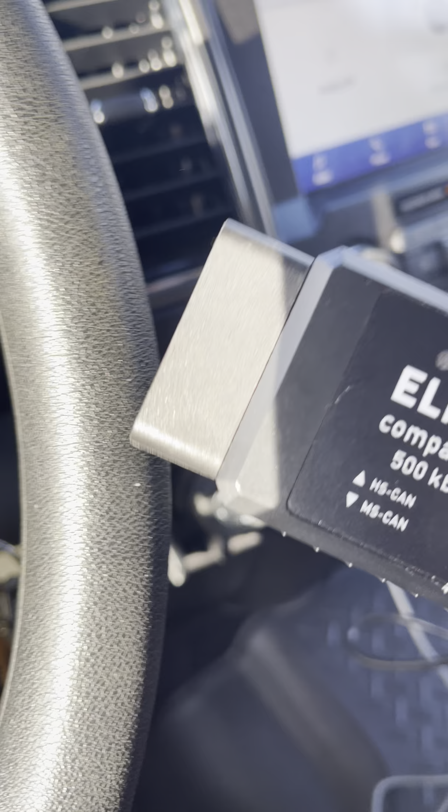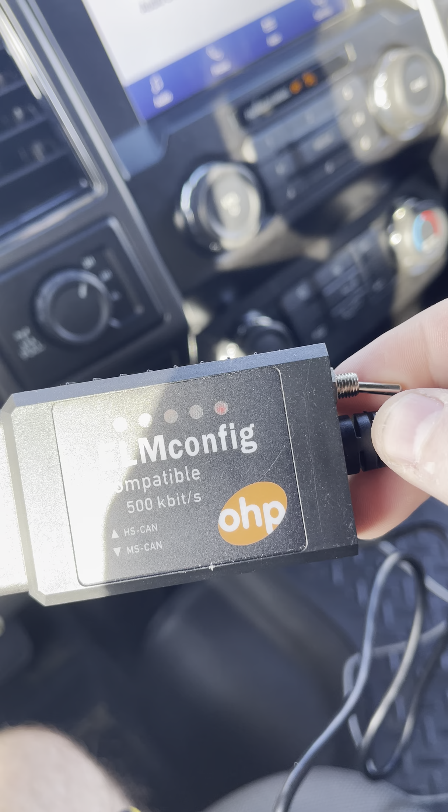So this is the connector I have. Some don't have the switch, some do. This one does, so as you use the program it'll kind of tell you what setting to have the switch in. To get started I'm just going to have it flipped. Actually, had it the right way, the HS CAN. I'll get this in the port down below, then we'll jump over to the computer.

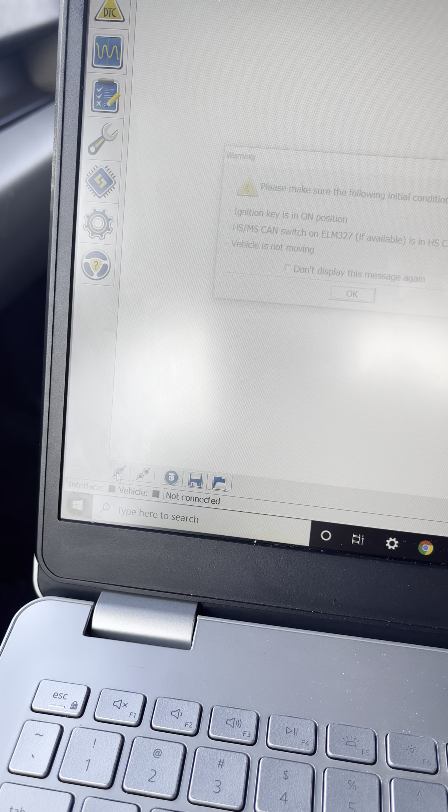With that connected, I'm going to go ahead and turn the ignition on the truck, which it is. When you open the program, you want to go to the top left icon that has the picture of a car with an information symbol. We're going to go down here to the bottom and select the button to connect. If you have that switch, the dialog says make sure the key is on, make sure your switch is switched over to HS CAN position, which it is, and we're not moving. So we're going to hit OK.

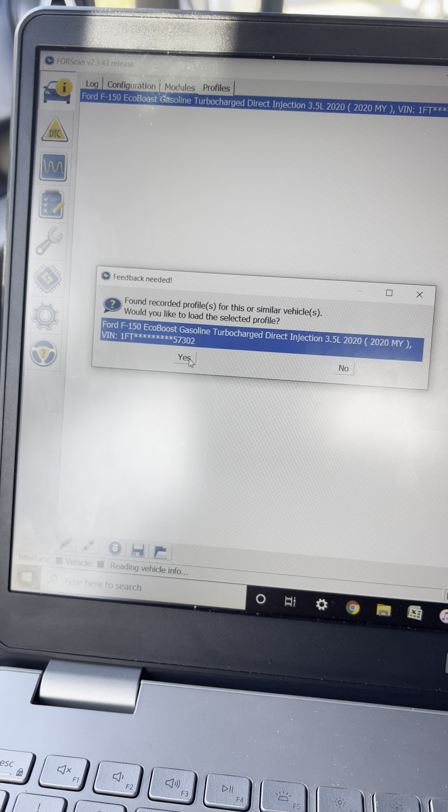And it's just asking to select a profile. I'm going to go ahead and hit yes, and it's going to start going through. Make sure everything's selected.

And now we wait. You can see on the bottom left it says reading vehicle info. This is my second time doing this; the first time actually took quite a bit of time. So this is kind of just going through the motions now, reading the computer, all the modules that are there. This could take a couple minutes here. While we're waiting for that to come up...

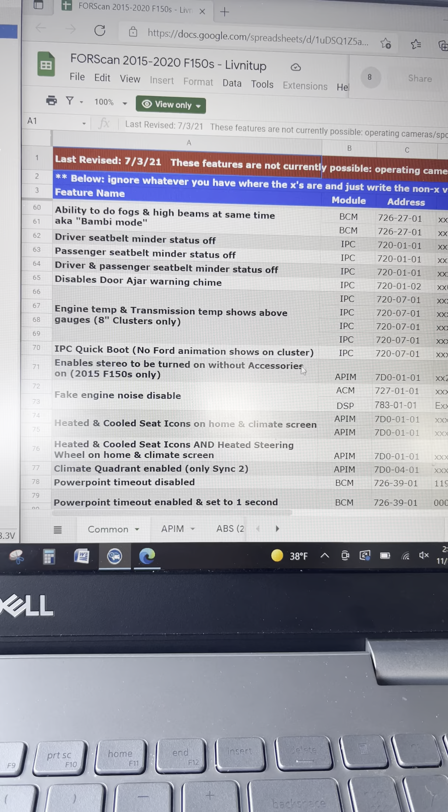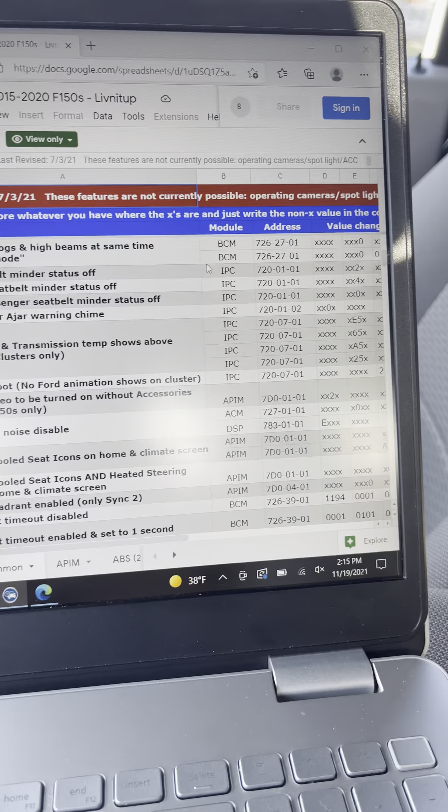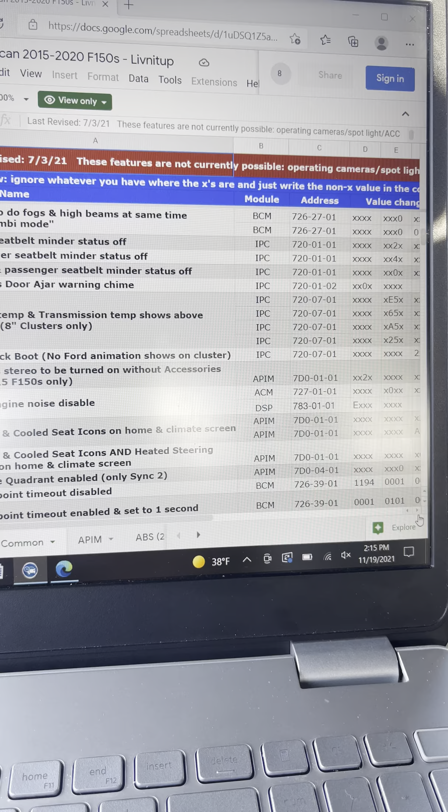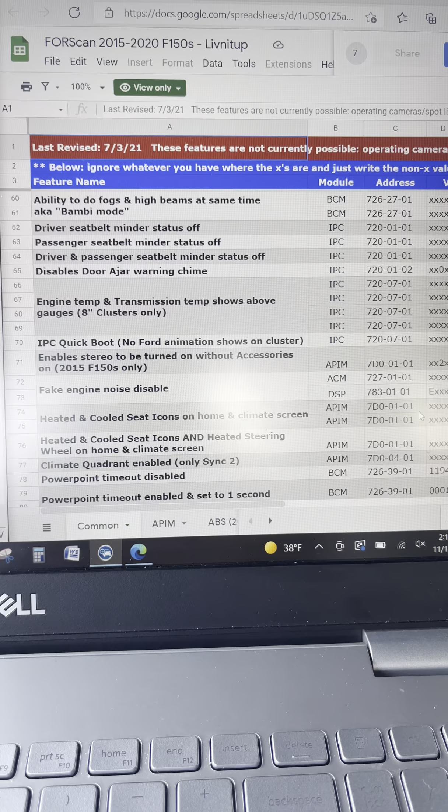I have the Google Docs file pulled up that shows there's a bunch of things you can change in here, really great information. I've already sorted to the one we're looking at, which is called Bambi mode, so which is doing the high beams at the same time. It's really great detail to where it shows you the module and the address of the module, and I'll show that once the program loads up here, and then the values that we need to change. Some of these changes require you to go into multiple modules and multiple addresses and change values. The Bambi one is pretty straightforward where there's only one module and one address, as you can see here.

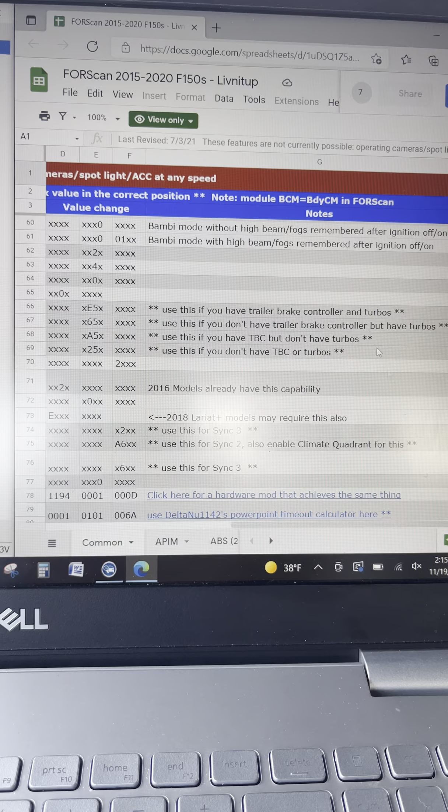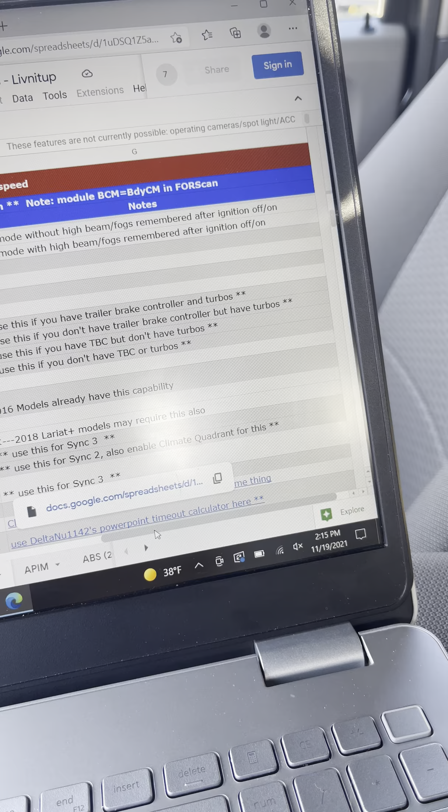And if we scroll over to the right just a little bit, it gives you a description of kind of what it does. But I'm just going to be doing the bottom one where it says Bambi mode with high beam / fogs remembered after ignition off on. Scroll back over here to the left.

So coming back to FORScan, on the bottom left you can see it says ready, so we are good to go ahead and proceed with making the change. The first thing we're going to do is go to the little symbol that has the processor icon. So we're going to come here first.

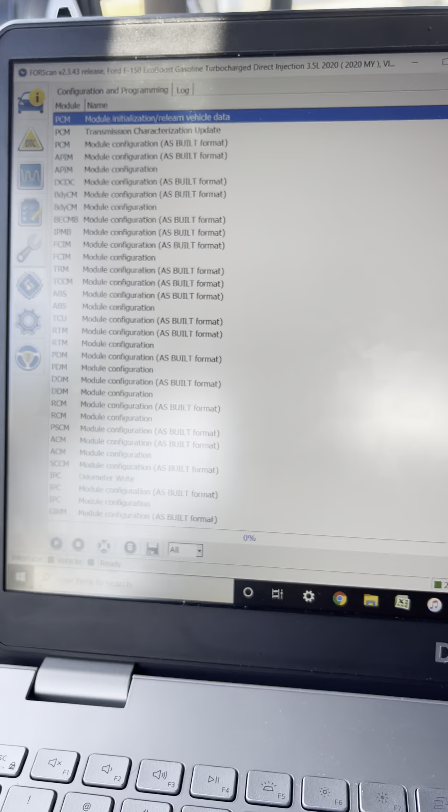And then, according to our file, this is listing all the modules here. So according to our file, we want module BCM. I'm going to go ahead and select BCM. Once I have that, on the bottom left-hand side there's a little play button to run the service procedure, so we're going to select that.

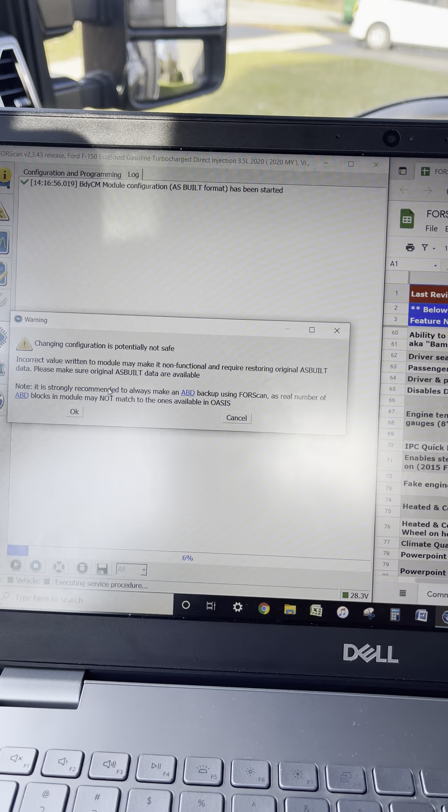Now it's going to ask me to, on my device, flick the toggle switch now. Hit OK. Now it's just giving a little warning saying potentially not safe, make sure you back up everything, which I'll explain how to do as well. We're going to hit OK. And it's going through reading everything, which is great. It's going quick. And here is the code.

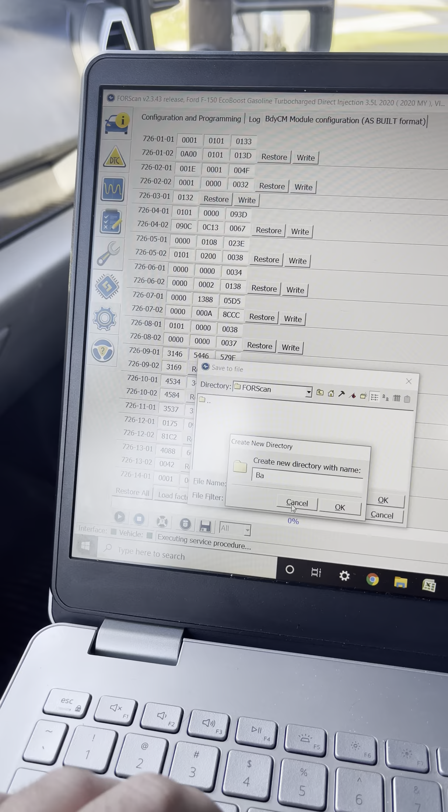So the first thing I want to do is come down here to the bottom and select Save All, so that if I make any mistakes I can easily reset this back. Let's just create a new folder essentially and call it Backups. We're going to hit OK. And that name, I'm just going to do bcm.original. And hit OK.

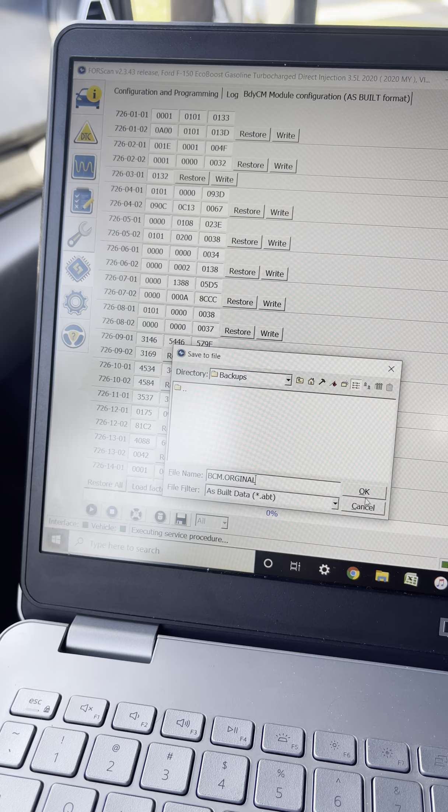Successful. So now all these values, which are default in OEM, have now been saved. So looking at our FORScan document for Bambi mode, we need to find address.

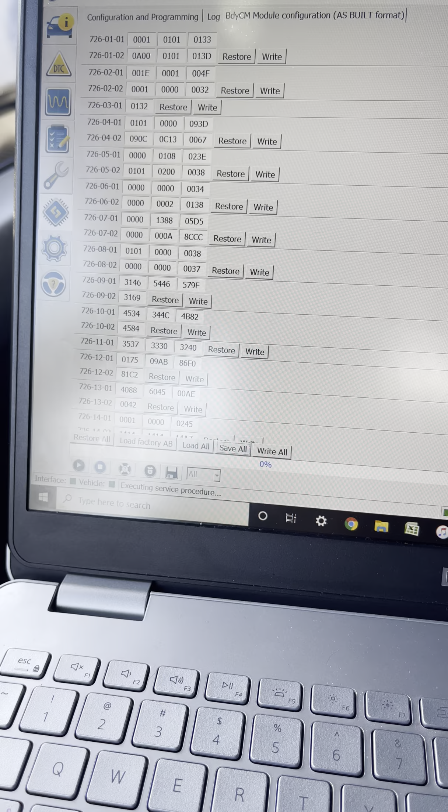7262701. Let me scroll... 726... it's going to take a while. 7262701. So you can see my default is...

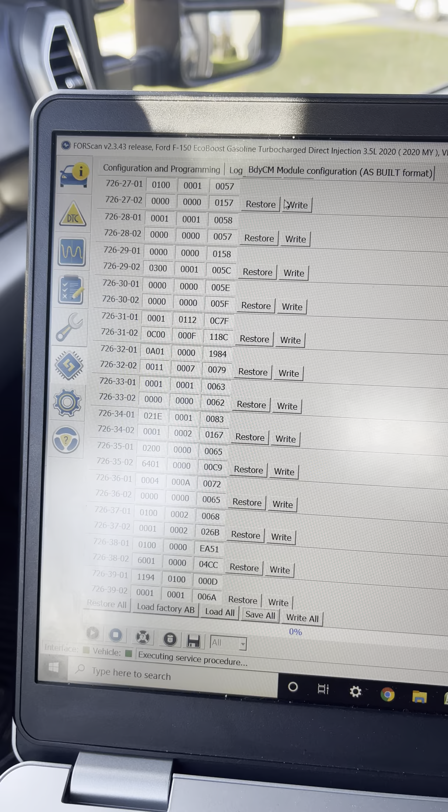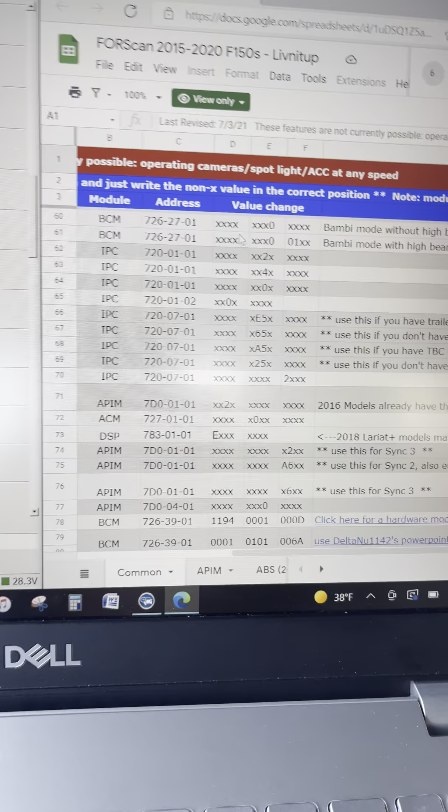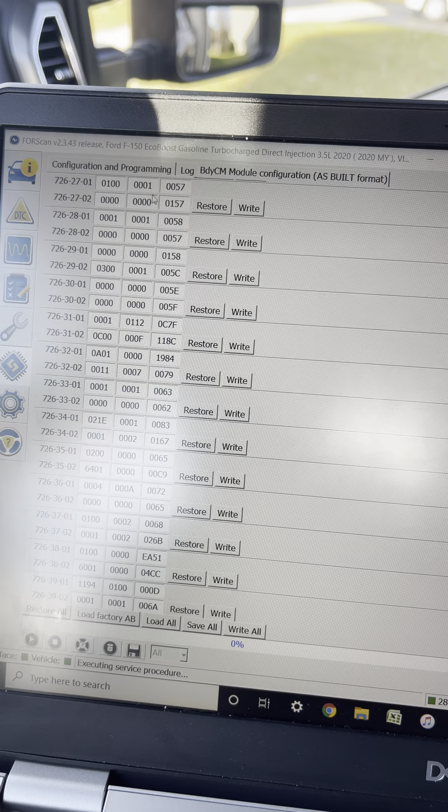010000010057. So if we take a look at our sheet, let me scroll off to the right here a little bit. The only values we have to change are not the X's, so the X's will stay the same. We only have to change the values that are populated. So in the middle section here, we need to change this to be 0, and the ending section we need to change to start with 01.

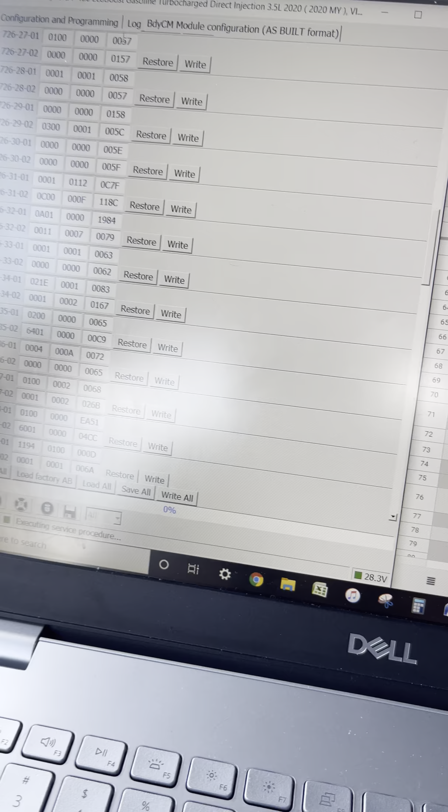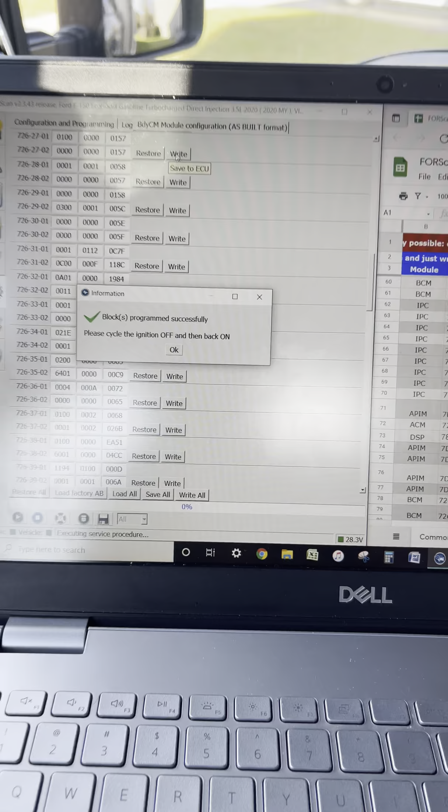So once I'm good with that, we're going to go ahead and up here we can hit write. You can see it's changing. Please cycle the ignition off and on. There's off, there's on, without starting the vehicle. Going to hit OK. So I don't have anything else to do, so I can go ahead and stop the service procedure.

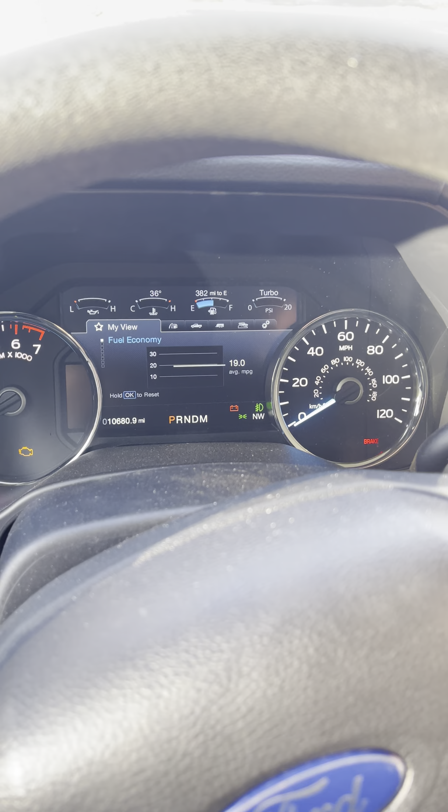So now if I come to my instrument cluster and turn on my lights, there - let me focus - there's the fog lights, and there's the high beam symbol. So now if we go out to the front of the truck, we should have both on. And there you go, successful.